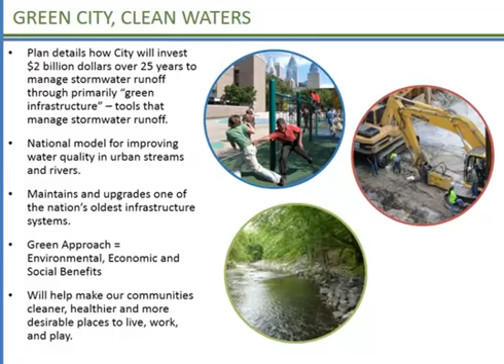What makes Philadelphia's plan to transform the health of the waterways unique is that it is very much an environmental, social, and economically beneficial plan for the city.

By taking a green approach, we're talking about making improvements on a social scale where we can see benefits coming from the enjoyment of a creek where the water is clean and there's more habitat. I also find people may picnic more often along creeks that smell good and look good. People will want to actually use their local parks if they're desirable and green.

We might see benefits that impact the economy, where there are trees on a residential street, there's a potential for an increase in property values. When there's trees in a community, there's better air quality. So for these social, economic, and environmental reasons, the Water Department felt that this was certainly an important way for us to go. It was also the more affordable way for us to go in addressing our water quality problems in the creeks and rivers.

I think the big question of how we plan to transform Philadelphia into a green city, clean waters, is one that we're dealing with every day. What we're doing to really make this transition is developing new regulatory tools and changing policies, making funding commitments and creating incentives, and really focusing on developing partnerships, new partnerships, and strengthening existing ones, but also working with citizens throughout Philadelphia to connect with these green investments that are very much local investments, developed over time, little by little, on a block scale. So it's really important that the citizens of Philadelphia understand what the Water Department and its partners are doing with them in their communities.

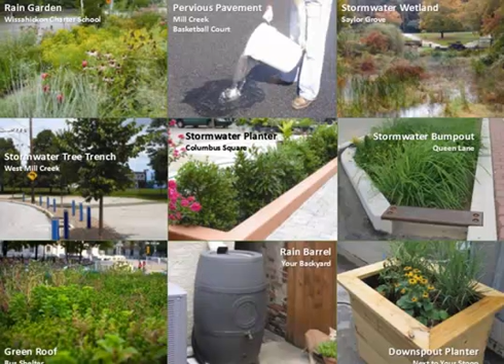This slide covers some of the tools in our toolbox, some of the sample stormwater management practices that we currently use. There are others, but these are generally the ones that are most popular. We feel that there's probably a lot of other tools out there that we'd like to explore, and we also feel that there may be better ways of designing the tools that we currently have.

Which really brings us to this Infill Soak It Up competition and our partnership with the EPA. I wanted to mention that almost a year ago, the EPA and the City of Philadelphia signed an agreement that really focuses on the formalization of the EPA and the City of Philadelphia coming together to help advance green stormwater infrastructure practices in the Philadelphia region.

As a result of that agreement and that partnership, which is extremely exciting for the City of Philadelphia, we decided to create working groups. One of the working groups that came out of this agreement and partnership is a public outreach and stewardship working group. The EPA had expressed to the Water Department

their thoughts on pushing more creative, innovative, and cost-effective ideas to help us better manage stormwater runoff, like Houston did with their low-impact development conference a few years back. So the Water Department responded to that request by putting out a request for proposals, and as a result, the Community Design Collaborative responded to the request for proposals to put on a competition, a green stormwater infrastructure design competition. The Community Design Collaborative really responded with a whole package of ideas, a series of design events that culminated into the big design competition 18 months later.

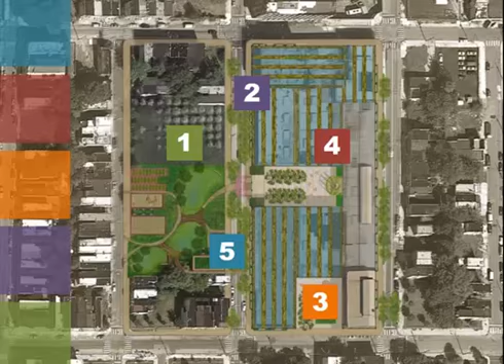This industrial block needs help, not just help with runoff, but help expanding businesses, help adapting buildings to new uses, help improving the neighborhood. Good news, though, help is here. This afternoon, we bring you 5 integrated strategies to transform water, place, and community.

The building on the site, like many others in these industrial zones, fills most of its block, leaving little land for rainwater management. It's too big for its current tenant, but the large floor plan does not lend itself to other uses. As you see in the slide, the roof is chopped up and irregular with multiple downspouts and drains as the roof has evolved and been added to over time.

This site has challenges often found at old industrial properties: no privately owned open space, likely soil contamination, old pavements, rubble fills. But the good news, a diverse neighborhood with emerging revitalization and business investment. This property can be part of that trend.

The design we're about to show you is the outcome of great collaboration by our team members: my colleagues at Roof Meadow, M Squared Architecture, the talented engineers at Meliora Design, environmental artist Stacy Levy, SED Design, who kept us appraised of costs and yet reminded us to keep dreaming, and InPosse. So here we go, our top 5 strategies for transforming industrial properties in Philadelphia.

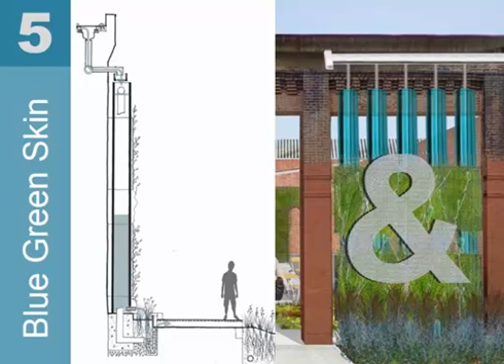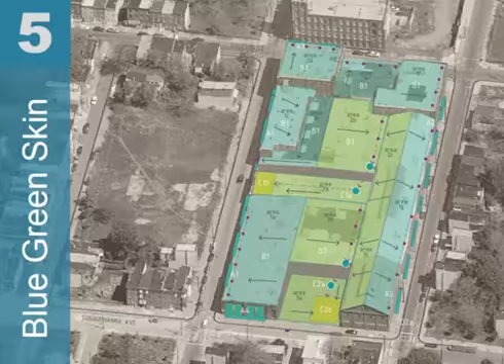These modular cistern units, which we imagine could be mass-produced and used in other buildings around the city and perhaps around the country, are spread around all 4 sides of the building. We've grouped them in 2s and 3s to minimize piping, but also to accommodate windows and doors. We think the groupings also add a rhythm and scale to these long blank facades that would actually help improve the general walkability in the neighborhood.

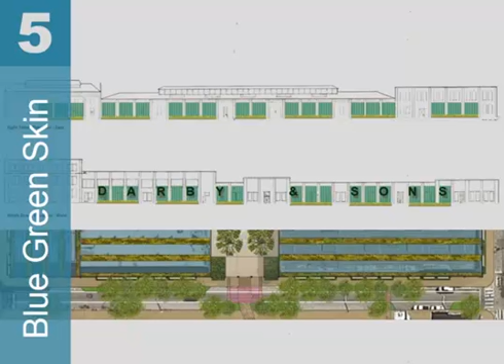And again, the metal mesh that we're using as part of the construction, made by the building owners Darby and Sons, can become an armature to support vines, artwork, and signage, in this case, the name of the building owner.

Strategy 4 combines thin green roofs with shallow ponded blue roofs that, together, detain significant amounts of runoff while keeping weights and costs manageable. We've applied this strategy to the flat areas of the warehouse roof. 1/3 is green, 2/3 is blue.

Any remaining runoff from the roofs flows either to the blue-green walls or to the proposed courtyards, a strategy that's coming up.

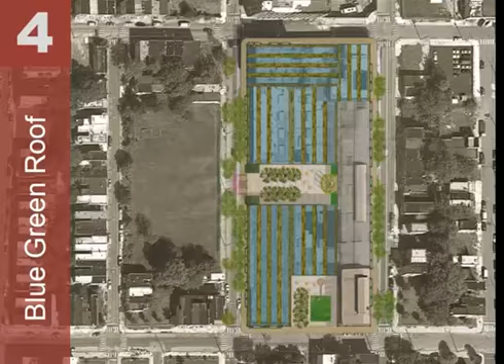Here you see the planted and ponded bands on the roof. At less than half the cost of a conventional green roof, this approach is competitive with other stormwater management practices. And at half the weight of a regular green roof, older industrial buildings can support it without structural reinforcement.

Rainfall is held back by shallow check dams and soaks through seepage socks at the joints. Strips of green roof act as natural filters for the upslope ponding. The planted roof soaks up water for evapotranspiration, where plants release water back up into the air.

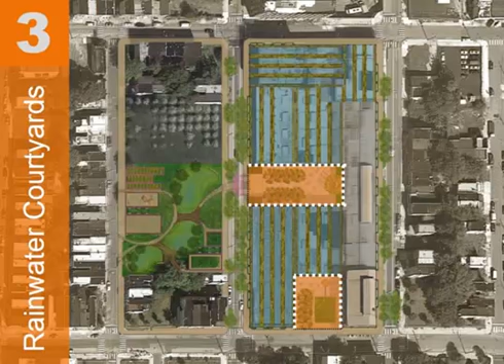In strategy number 3, we've taken away a little to gain a lot. In this case, we're carving out rainwater courtyards out of the larger floor plan. These courtyards can provide space for additional runoff management, but just as importantly, they can allow natural light and visibility deeper into the structure to attract new uses and new tenants.

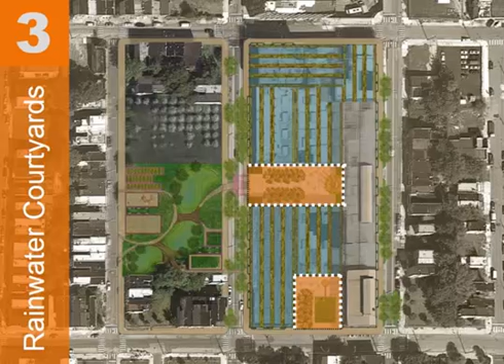The courtyards can become outdoor spaces accessible from either the sidewalk or the building—maybe a cafe or a hipster pop-up, or just a private outdoor space for tenants. The courtyards also allow opportunities for a more playful design of cisterns and downspouts, as you see here inside the courtyard in this rendering. We think this is a possibility to be more playful and reveal the movement and the magic of rainwater.

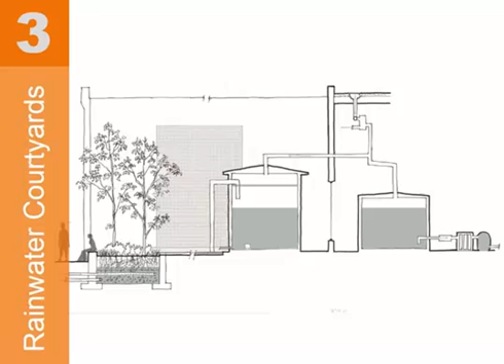In this cross-section at one of our rainwater courtyards, you can see additional cisterns and small infiltration beds that can accommodate additional rainfall. Remember, this building is so large that without carving these courtyards into it, there's no land available for infiltration. Some rainwater can also be used inside the building for toilet flushing and similar uses, and we've included a separate cistern for that, along with filtration and disinfection, as shown in the drawing. We've also imagined these courtyards would be constructed at a later phase as the neighborhood and real estate market evolve and as funding becomes available.

In strategy 2, a tree trench mimics a natural spring. On the right, water washes off the street through a wire mesh screen produced in the warehouse and then fills the trench. Water fills the trench and wells up at a spring point on the left next to the sidewalk. It overflows through a trench drain below the sidewalk.

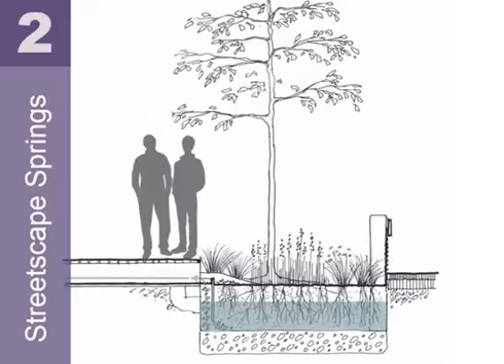The streetscape springs handle runoff from the road and the sidewalk. A series of tree trenches, shown here in the darkest blue, become a system that connects rainwater to other greening strategies. Rainfall from the public streetscapes can also be managed in the courtyards, which have excess capacity. Here, private property has the opportunity to provide a public service.

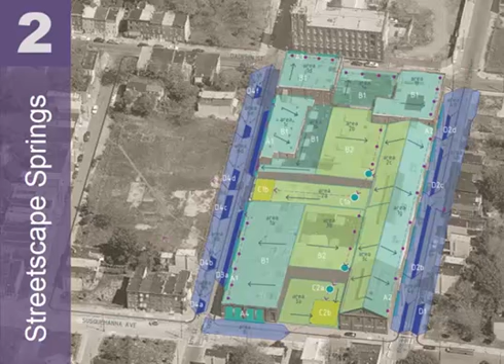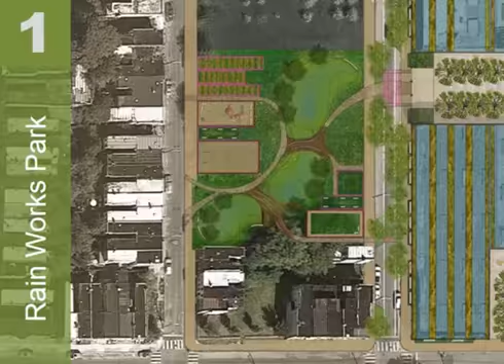In this last strategy, rain gardens are the heart of a park that serves two needs, rainwater and community. The central rain gardens showcase a healthy urban ecology. Curving bridges featuring Darby's wire mesh link the activity spaces on each side. The rain gardens are designed as a horizontal groundwater system of limited depth. The pervious activity areas let rainfall seep gradually sideways into the central rain gardens, which are both sponges and filters. Infiltration is an enhancement, but not a requirement on these uncertain soils.

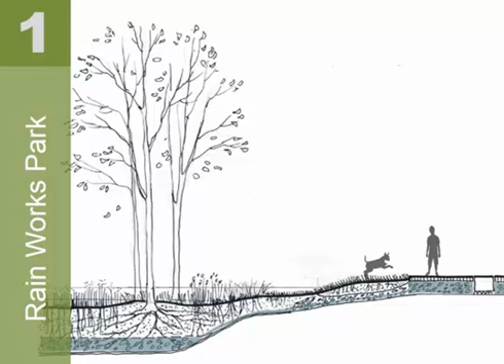Here you can see the sequence of rain gardens, which are fed by water from the park and adjacent streets. Note that the park's rain gardens are serving the public space. Contrary to expectations, the warehouse is managing its own stormwater. However, Rain Works Park has the capacity to handle overflow from adjacent development sites if wanted.

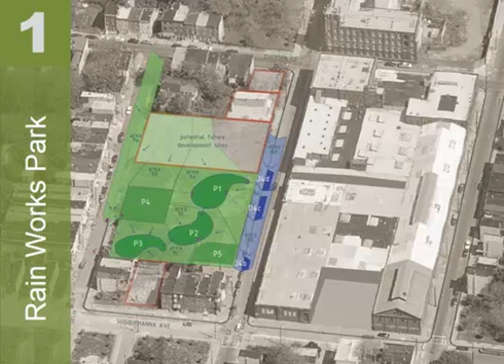Flexible open spaces on either side belong to the community, and the community defines their uses. Activities are paired in a way that enhances both. Perhaps community garden spaces and a kids' play area, a basketball half-court and shaded seating, or a dog park and picnic area. The diverse park reflects a diverse neighborhood.

Our 5 strategies, working together as an integrated system, manage close to 3 inches of roof rainfall within the Water Department's desired cost range. Perhaps more importantly, though, these strategies also enhance the character of the street, support higher quality tenant spaces, and help regenerate local businesses and the community.

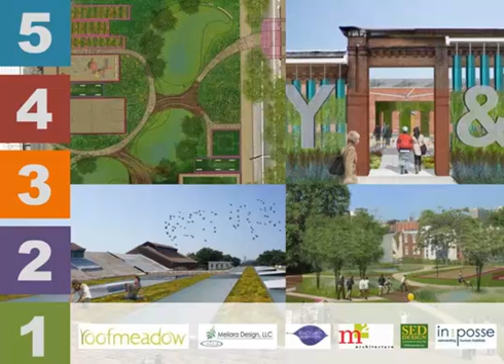Stormwater is a problem. Rainwater is an opportunity. Stormwater is seen as waste to be sent away to the sewer. Rainwater can be a resource that can be used and enjoyed. On this 19th century site, a 21st century approach to rain can help renew not only the urban hydrology, but the urban fabric itself. Thank you.

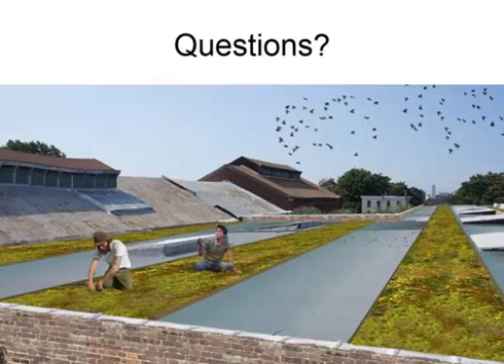We greened, I think, around 7 acres here, though I don't have the chart in front of me to confirm exactly. Okay, super. Well, thank you very much. Thank you, that was an excellent presentation.

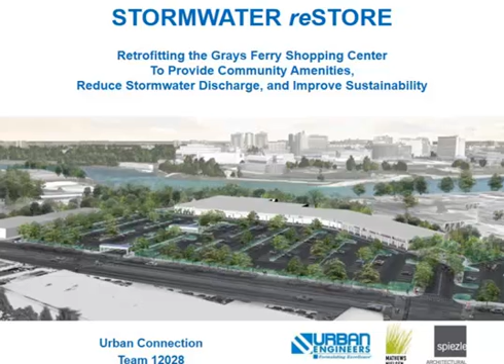Thank you, Dominique. Chris Gubineau with Urban Engineers, and Johanna Phelps with Mathews Nielsen. Just to give you a little background, like Musco did for his project, our project is a retail commercial site with an anchor grocery store in an urbanized area of the city of Philadelphia, in the Grays Ferry section of the city.

Like many urban shopping centers, it is saddled with large parking areas that are requirements of old zoning codes, and large buildings that sit either at the very back of the property or along the edges, and really are very car-centric and not very pedestrian or people-friendly.

Along with this, our property abuts the Schuylkill River in the far back corner, and in the planning for the Schuylkill River, there's a Schuylkill River trail planned that will run along the southern and eastern edge of the river. Part of it is already constructed, and as funding becomes available, more of it becomes able to be designed and built. So with that in mind, I'm going to get started.

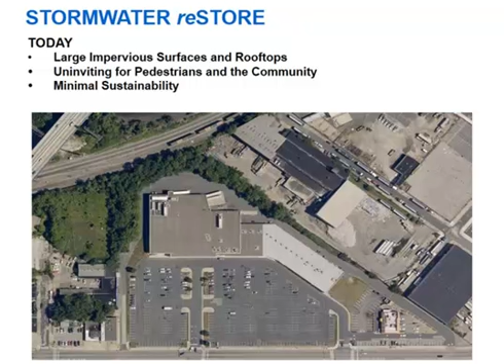The shopping center has large impervious areas, including parking lot pavements, driveways, and over 81,000 square feet of roof. A large parking lot and setback building promotes the use of cars and does not invite pedestrians or the community to come in and spend time. Additionally, there are minimal sustainable elements on the site.

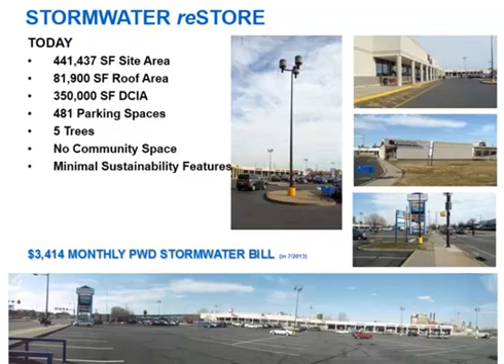The property is over 10 acres in size, and over 80% of the property consists of directly connected impervious surfaces, draining to combined sewers in Grays Ferry Avenue. The large expanses of pavement and buildings create a barrier for access by pedestrians in the community. And for all this, the owners get to pay a $3,400 a month stormwater bill.

We looked at many ways to improve the shopping center through on-site versus off-site improvements, at-grade or underground stormwater features, blue or green roofs, and everything in between. And we always came back to focusing on the creation of community amenities and public spaces that functioned as stormwater improvements.

Our three design goals were: create cost-effective stormwater management opportunities, create a more pedestrian-friendly and community-oriented design, and identify energy-reducing and sustainable building initiatives. In our design process, we began to focus on identifying many small, incremental improvements that added up to a much larger overall impact.

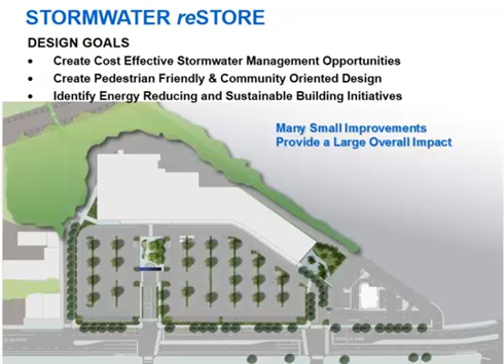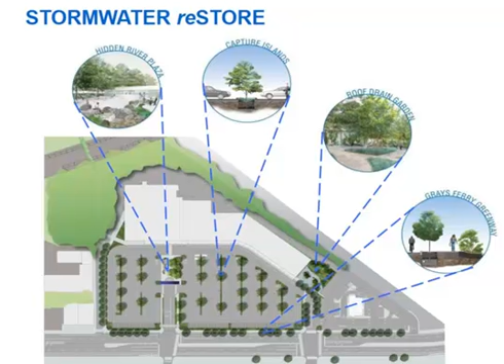Our many small improvements are reflected in the design of the Grays Ferry Greenway and Capture Islands, which focused on rain gardens and linear stormwater improvements within the parking lot. The roof drain garden and Hidden River Plaza took underused or found spaces in the site to provide significant and sizable community gathering spaces that also handle stormwater.

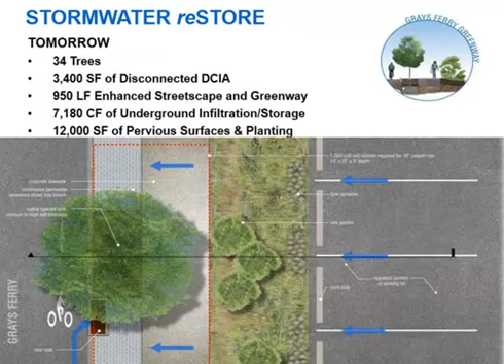By reconfiguring the southern edge of the parking lot, we were able to create a greenway along Grays Ferry Avenue that provides opportunities to incorporate sustainable green stormwater infrastructure into the streetscape. This design added 34 trees, provided 950 linear feet of streetscape, and included 12,000 square feet of plantings and pervious surfaces.

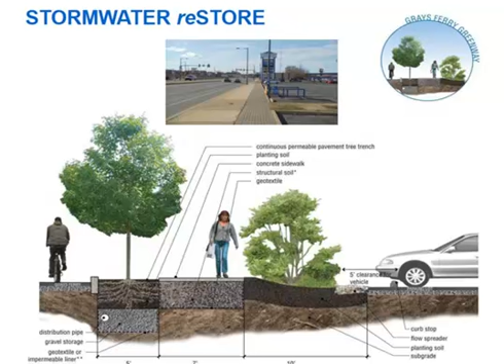The existing sidewalk feels like an island between the roadway and the parking lot. By taking the last few spaces of parking in each row, we were able to create a 22-foot wide greenway with a rain garden and planting buffer on either side of a pedestrian path. By improving the pedestrian feel of the property, we can provide stormwater infiltration or storage and timed release.

The Capture Islands utilize space within the parking lot by reducing the existing 28-foot wide drive aisles to 24 feet. The Capture Islands are rain gardens that include trees and do not require regrading or repaving of the parking lot. Runoff is intercepted as it flows and can either be infiltrated or stored and released.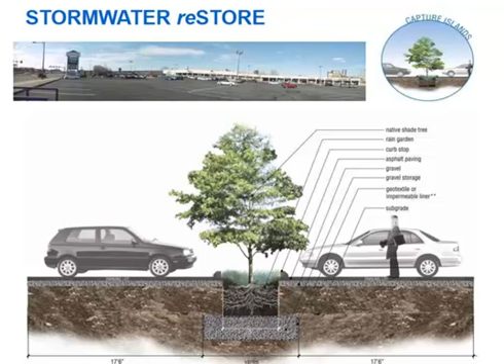The large expanses of the existing parking lot paving will be broken up by the rain gardens, reducing the heat island effect and giving the parking lot a more pedestrian scale and a friendlier feel. By implementing the rain gardens in the parking lot, we're able to disconnect the impervious areas and again provide opportunities for infiltration or storage. From the beginning, we saw the 2-acre rooftop and the adjacent unleased 8,000 square foot lot as two major site opportunities.

So we took the underutilized vacant lot and repurposed it as the roof drain garden, a public plaza and rain garden to handle runoff from the rooftop. The roof drain garden is outfitted with permeable pavement, a green wall, benches, and bike racks.

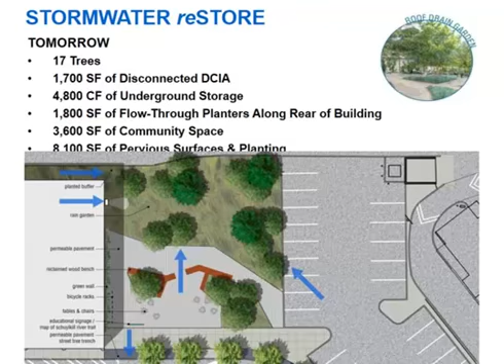It operates as an educational stop on the Schuylkill River Trail with signage demonstrating the function of the stormwater system and creates a connection between the site, the river, and the watershed. If the site is needed for a tenant in the future, the runoff can also be collected in underground storage beneath the building and the site can be leased.

We saw another opportunity in the northern portion of the parking lot's main entry drive. Early on, we realized that the parking lot circulation can function without this drive aisle. So we took back the square footage and transformed the space into the Hidden River Plaza.

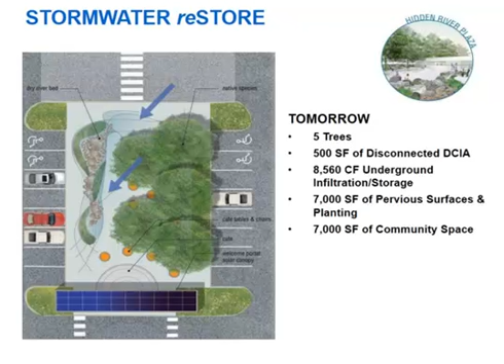One of the translations of Schuylkill is Hidden River, a reference to the invisibility of the river due to vegetation overgrowth. Over the years, industry became another barrier that literally hid the river. To celebrate and highlight the proximity of the river, the plaza features a dry riverbed, and on rainy days, water collects to reveal a river.

The plaza also features a leasable net zero cafe that uses solar energy and other sustainable initiatives.

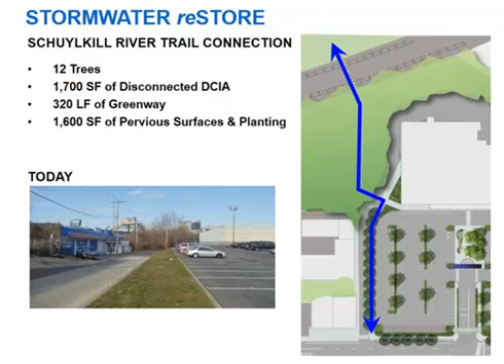To make a physical connection to the Schuylkill, we continued the rhythm of the Grays Ferry Greenway and brought it up Stanley Street to a pathway. From the pathway, a bridge takes bikers and walkers over the train tracks to connect to the Schuylkill River Trail. Signage along Grays Ferry and on Stanley Street will help direct pedestrians to the bridge.

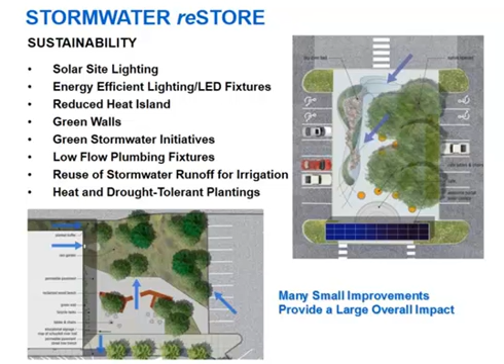Lighting of the trail connection and the parking lot is just one of the sustainable measures we looked at, utilizing energy-efficient, solar-powered LED lights and fixtures. By adding plantings and trees in the parking lot, green walls along the building, and the use of low-flow plumbing fixtures within the facility, there is an opportunity to reduce long-term maintenance costs for the facility.

By approaching the project with small incremental changes, the stormwater restore improvements are able to reduce the directly connected impervious areas by 84%, using rain gardens, infiltration, storage, and landscaping.

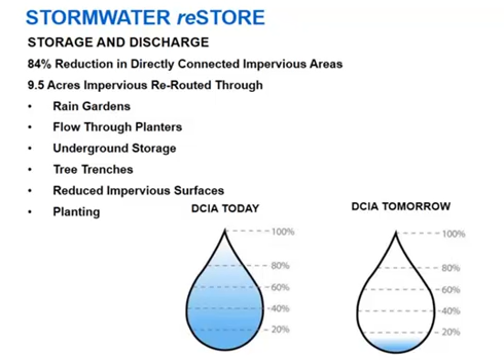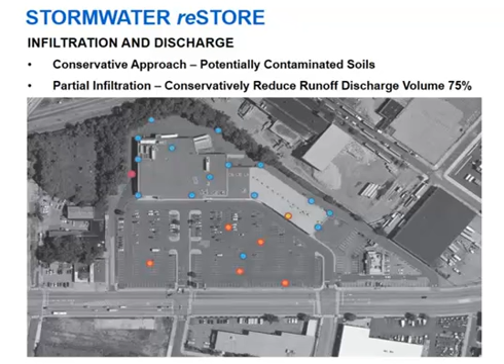Our incremental changes are conservative in their application. We looked at a phased approach to minimize impacts to the shopping center operations. Our design is also based on storage and release of stormwater. While we want to infiltrate, the potential for contaminated soils may require further testing to utilize infiltration.

The stormwater restore initiatives will plant 92 trees, add 1,300 linear feet of greenway and streetscape, and provide for almost 22,000 cubic feet of stormwater storage or infiltration. But the biggest number is the 10,600 square feet of community space that is created from the unused vacant pad site and the found space in the parking lot.

By implementing the stormwater restore initiatives, we can reduce the owner's stormwater monthly bill from just over $3,400 to just over $550 per month. We improve the pedestrian access, provide open space and community amenities, and draw more people to the site who will stay longer, spend more money, and come back again and again. Thank you.

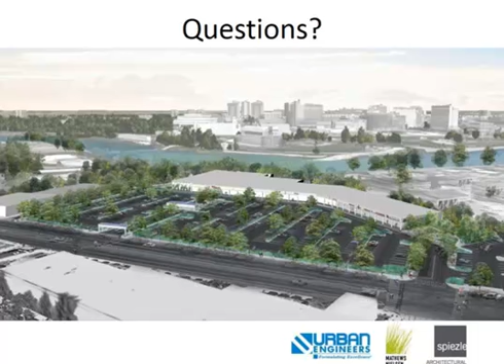I'll start with this one. In fact, with a little bit of a backdrop, this is a repeat from the question for the previous presenters. The question is, what is the most expensive BMP for a green acre? And could you talk to some of the costs per green acre relative to the design and technologies you're using?

I think, well, from the technical side, the cost per green acre, the most costly was actually the streetscape and incorporating the green initiatives into the roadway and getting the parking lot to accommodate the stormwater runoff and improve that capture. Overall, we end up around $100,000 per greened acre.

So it's pretty economical. I think it goes in line with the numbers that we're reducing the owner's monthly bill by almost $3,000 that he's paying in combined sewer outfall bills. So that's good. Who is responsible for the maintenance of the new green infrastructure?

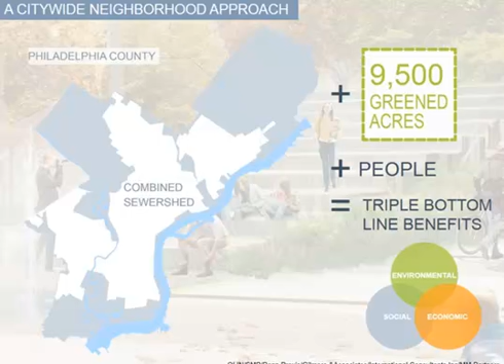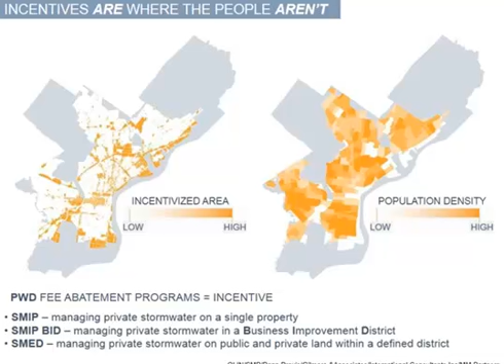So it's easy to see why current policy favors the large land parcels. There are fewer complications, fewer landowners to deal with, and a high potential for a good return on investment. If you contrast that with working in a neighborhood context, there are space constraints, utility complications, and the complex fabric of small homes and businesses present significant challenges.

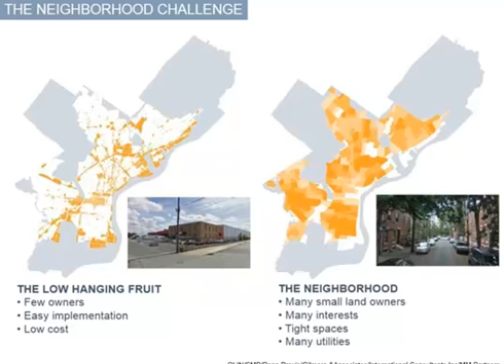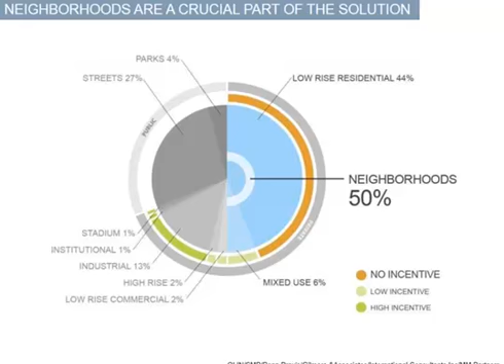We know that the challenge is great, but we believe the reward is greater for working in these areas. With the triple bottom line benefit aside, the city's goals simply cannot be reached without the neighborhoods. The row homes, corner stores, restaurants, and shops that define Philadelphia's neighborhoods actually make up half of the land area in the combined sewer shed. Therefore, it's imperative to seek innovative solutions for neighborhoods like Queen Village. I'll pass it over to Richard.

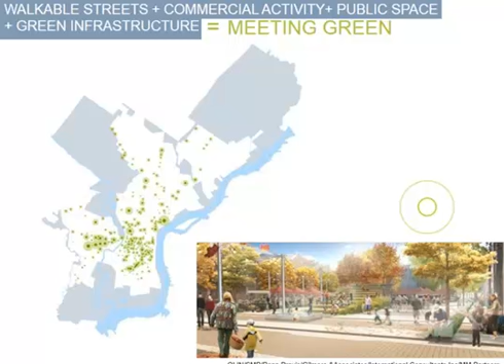To develop a strategy that took green infrastructure into the neighborhoods, we had to look at the 9,500 green acre goal and see what portion should go to the neighborhoods, to develop a cost model that works holistically for PWD, but also provides the opportunity for achieving a true triple bottom line benefit. The strategic sites where we thought green infrastructure would have the most meaningful impact within the neighborhoods were places where we meet each other: walkable streets, commercial activity, public space. Add green infrastructure onto that, and you're creating what we call meeting greens.

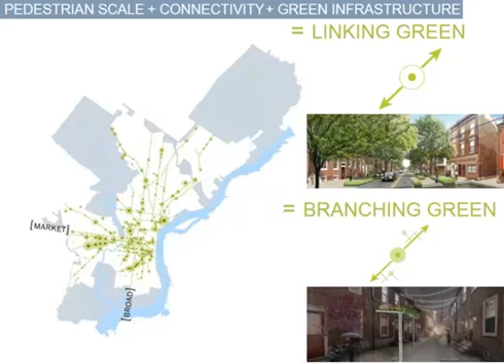These meeting greens become even more meaningful to the urban life of the city when we can link them together, and so attached to that is this idea of connectivity. We connected these pathways for pedestrians and cyclists through the city with green infrastructure, and these are called our linking greens and our branching greens. A linking green is simply a cross-city connection between these neighborhood meeting points, and the branching green is the finer pedestrian network that connects a given neighborhood.

Queen Village is near the Delaware side of our waterfront. It is a very tight-knit mixed-use community. There's no parcel greater than 15,000 square feet. It's really a neighborhood of small businesses and residential masonry row homes, and the neighborhood network itself really called for a solution that would span these many different parcels, and it's quite impervious to boot.

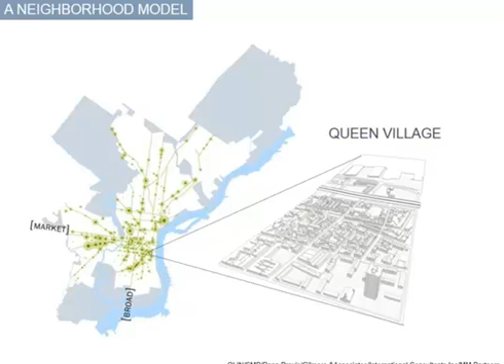As we walked through the neighborhood and we looked at opportunities, we saw that there's some key intersections within Queen Village that were quite interesting to us. A place we called Center Green is the intersection of Christian Street, 2nd Street, and Moyamensing. We noticed was the key commercial meeting point for the community.

At the Shot Tower Recreation Center, it's a historic building with an athletic field attached to it. We saw that as another crucial meeting place within the community. And then we also recognized some divides that existed created by our interstate, I-95, that cuts off Queen Village from the waterfront.

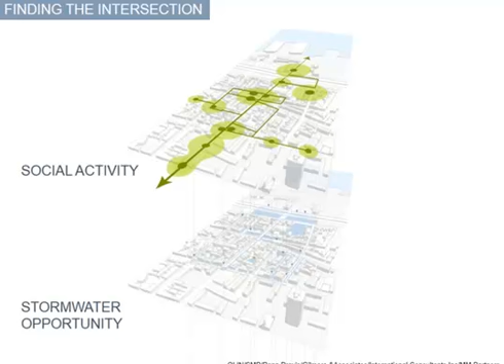When you look at the places where people meet and where there's opportunities to build connectivity within the neighborhood, and you overlay that with the stormwater catchment, that became our template for building a plan for Queen Village that would holistically incorporate green infrastructure goals.

Looking in detail at this plan, we were able to identify a catchment of approximately 42% of the neighborhood. And we developed a couple of strategies from infiltration planters to permeable pavement systems where we could collectively manage between 1 and 3 inches of the stormwater event through a hybrid strategy of both public and private catchments of stormwater.

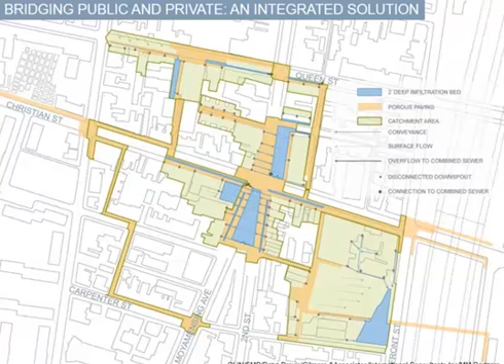So when you look here at the center green, this is green infrastructure taken on a role beyond simply managing water. It's part of the placemaking experience. And here we see a permeable paved plaza with a center stage that has a celebration green to it.

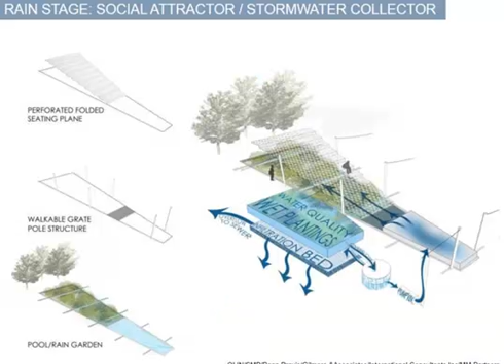Looking in detail at that place of gathering is called the rain stage, and the rain stage sits above a stormwater wetland that collects stormwater and manages it from this new piazza that we've created within Queen Village.

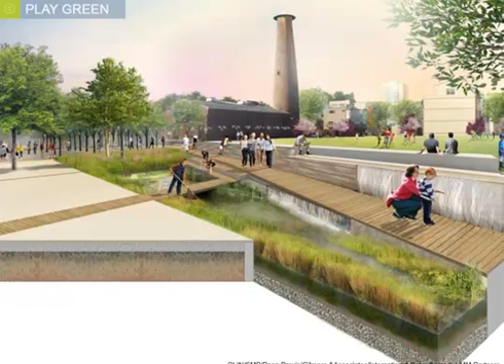At the shot tower green, the historic shot tower is complemented by a historic natural feature, which is the stormwater management wetland we've put here. Historically, this area had marshlands to it, and so we're really returning some of the local ecosystem to the environment through this stormwater wetland and adding an additional layer of community amenity with this feature wrapping the existing park.

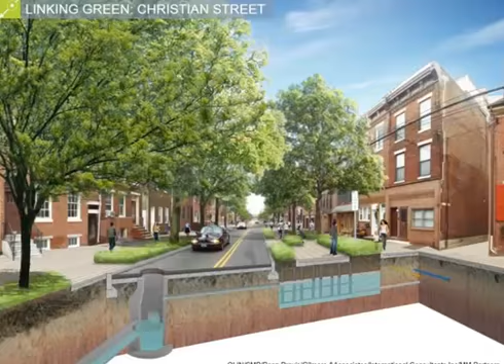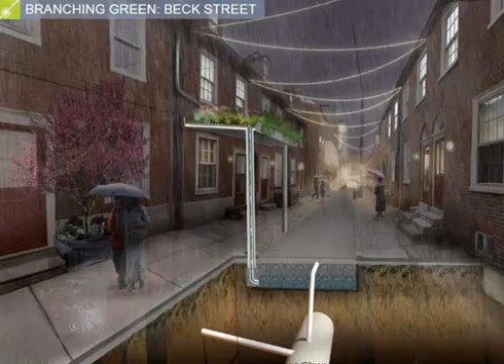At Christian Street, the proposal is to create a green street that is more habitable to the pedestrian and to the cyclist, while capturing stormwater along the linear path, which goes east to west between the waterfront and the neighborhoods of South Philadelphia. And at Beck Street, we have a branching green, which creates a community alley network where pedestrians come from their homes and have a safe pedestrian route to the meeting greens of the neighborhood.

Pedestrians come from their homes and have a safe pedestrian route to the meeting greens of the neighborhood, and a stone bed collects stormwater from the adjacent housing within the neighborhood.

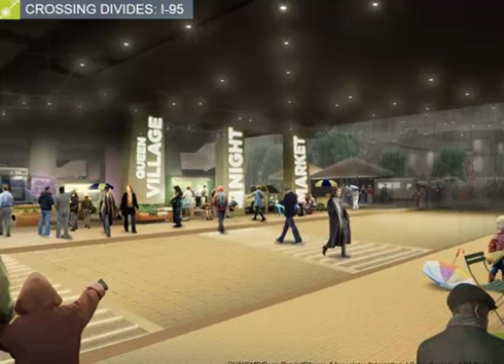This opportunity to transform a third of the combined sewer area into a managed green infrastructure system is also an opportunity to heal divides in our city where there are barriers in the landscape, such as this rendering of the I-95 overpass. This area is ripe for creating an area to capture large volumes of stormwater from the interstate and adjacent lands, and it's also great for creating a place where there would be a farmer's market as well there.

It's an opportunity to change quite a large area of our city because so much green infrastructure development needs to take place.

So how do we actually get all this done? Our proposal relies on a bottom-up approach, which means that communities provide local intelligence that informs the planning for green infrastructure within their own neighborhood. This creates solutions that are uniquely responsive to each neighborhood. They strengthen the character of the place and actually provide a sense of ownership among its residents.

So while insight will be drawn from the communities, the Philadelphia Water Department will ultimately shepherd the process. So through a new Office of Green Neighborhoods, the Water Department would coordinate closely with neighborhood associations to manage projects and administer funds. And public funds could be distributed on a sliding scale to address all neighborhoods equitably.

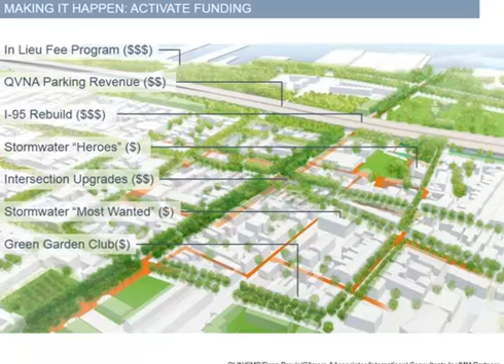Thank you, Richard and Ari. That was a great overview of this winning design. Once again, we're going to open up for some questions. We do have some time. Same questions as before popping up.

Can you give us some information in terms of the number of green acres, and also cost per green acre? So the neighborhood area was approximately 20 acres, and we had a strategy that we think went beyond the goal. If we were able to do 42% of the neighborhood, we would have gone above the PWD green infrastructure goal. There was approximately 8 acres managed in terms of capturing water and infiltrating it within the neighborhood. In terms of cost, that was one of the issues we struggled with, because as soon as you bring green infrastructure into a site with many parcels and infrastructure below ground, your cost points move upwards. If you took the 9,500 greened acres and divided that into the $2.4 billion sum, you would wind up with a number around $200,000 per acre, and we were quite a bit north of that.